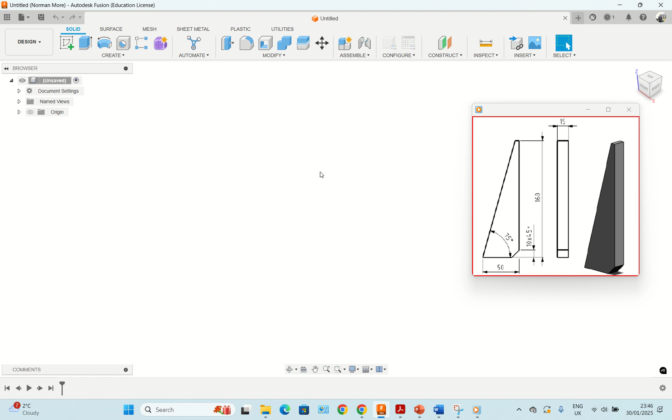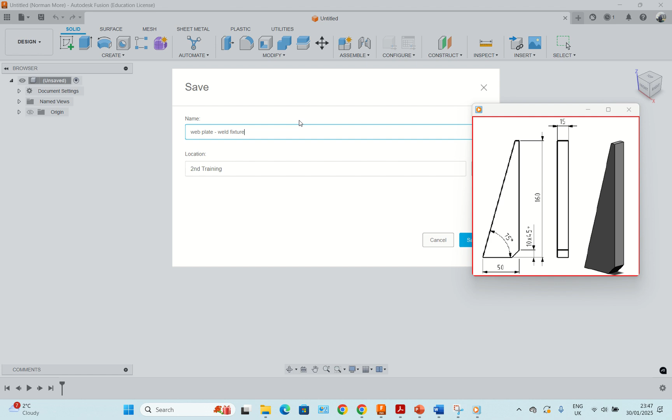This is now the third part of our sub-assembly for the weld fixture. So as usual, we start with saving anyway. So I'll call this a web plate for the fixture, and then save it in our folder for the weld fixture and save.

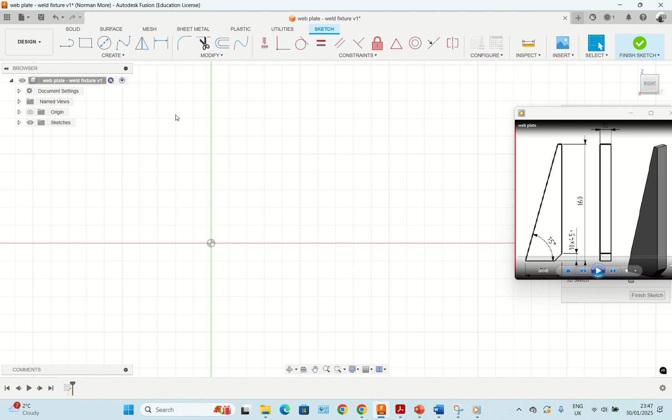So okay, we can start with the red plane. Looking for a point now to start our drawing. Maybe we can start with this corner without the fillet, I mean the chamfer. So we go up 160 mils and left. From that point we can go 50 mils, and from this point we go up, but we don't know by how much, so we can just go a bit off the line.

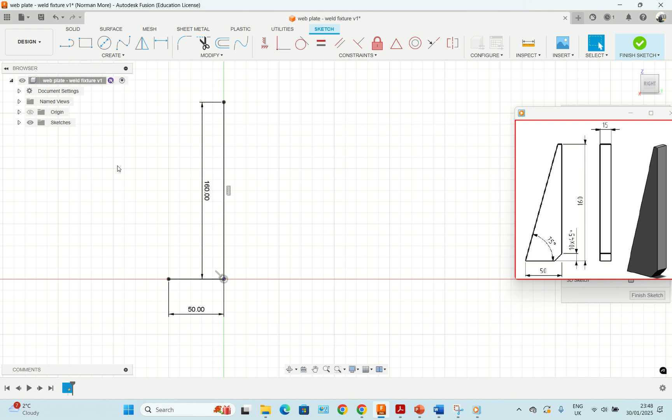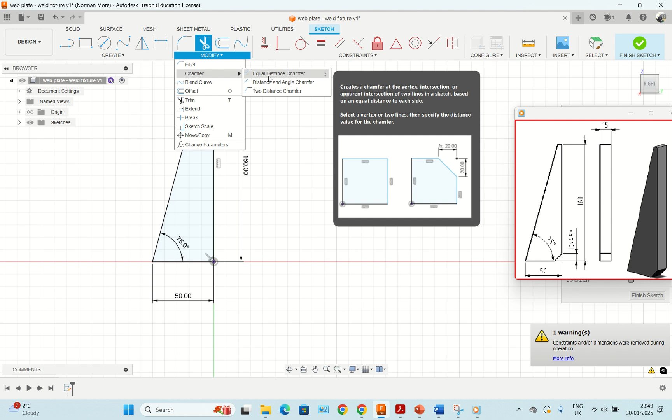So if we draw a line from this point, we just have to cut that one and then we trim. So you can either press trim or letter T, and then you trim off those two ends. And then at the bottom here, all we need to do is put a chamfer, equal distance chamfer, and the chamfer is between these two ends, and the chamfer is 10 mils. And that sketch is now finished.

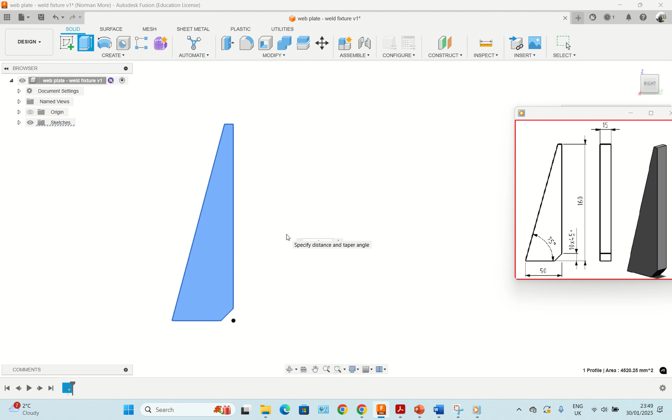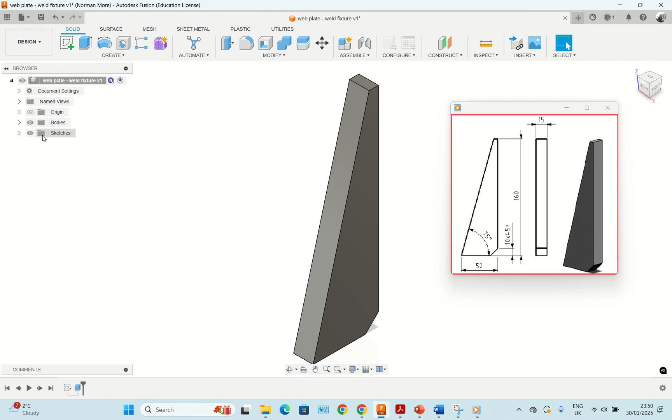We do extrude by 15 mils, and that's the end of that. Let's check this extrude, edit feature. Yeah, it's 15. That's fine. So we now go to the assembly.